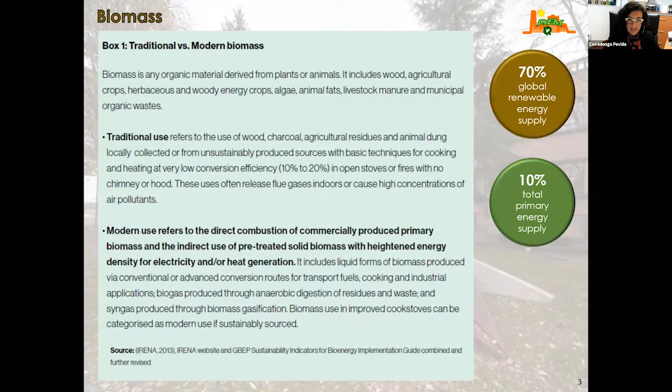We also have an increasing demand of biofuels, and of course we can produce biogas out of biomass. But what is clear today is that bioenergy accounts for about 70% of the global renewable energy supply, about 10% of the total primary energy supply. And regarding the end uses of bioenergy, the largest share corresponds to the building sector with 26%.

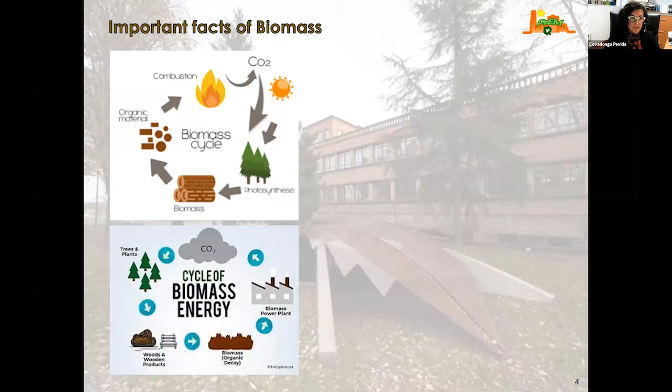So what is important about biomass, as Professor Rubiera has already highlighted, is that biomass takes part in the carbon cycle, which means that biomass is produced by photosynthesis and uses CO2. So it's a natural contributor to the carbon cycle. But what is more important in terms of the energy utilization of biomass is that the CO2 emissions coming from biomass are considered neutral. So that is very interesting from the renewable and sustainable point of view.

So we can end up with a summary of some energy pros and cons from biomass. If I need to highlight, I may say that biomass can be seen as a renewable, widely available, and diversified source of energy that can be cheap and that has a lot of potential in many applications. The main weaknesses could be that large-scale devices may be costly today, that they may not have high efficiencies, and there are still some associated issues with environmental and health concerns related to the use of biomass for energy production. But as I have already commented, there is a broad range of applications of biomass.

So let's analyze a little bit the different pathways for conversion, product, and end use for biomass. We know we have a lot of feedstock possibilities, as I commented previously, but focusing on the production processes, we have two main alternatives. One is the biological route, and the other is the thermochemical conversion route.

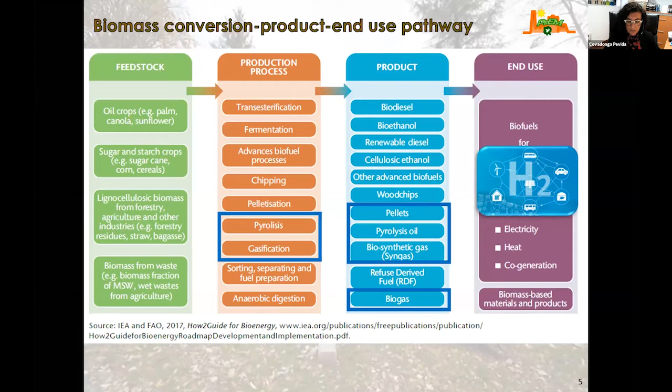To use biomass for energy purposes, it is important to pre-treat biomass because, as included in a previous slide, the density of biomass is low compared to fossil fuels. So there are two main ways to increase the density. One is pelletizing biomass, so you can pelletize biomass and see how you manage to increase not only the bulk density but also the energy density of raw biomass.

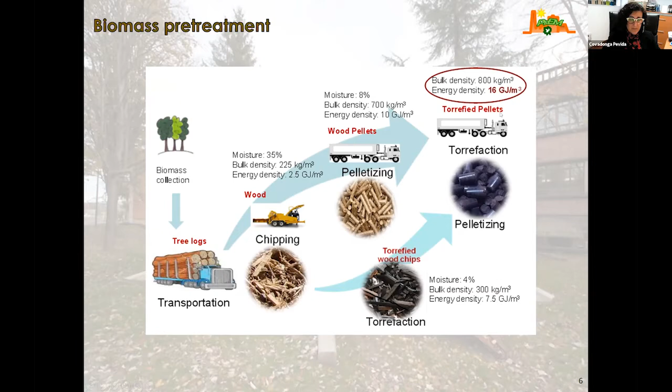But you can also thermally treat biomass in a process called torrefaction, a mild heat treatment, and you arrive at a significant increase in energy density. If you end up pelletizing this torrefied biomass, you will have a fuel with very appealing characteristics to be burned in boilers.

I'm not going into details, but just to mention there was a statistical report issued last year in 2020 that you can check. It was issued by Bioenergy Europe and devoted to the pellets market.

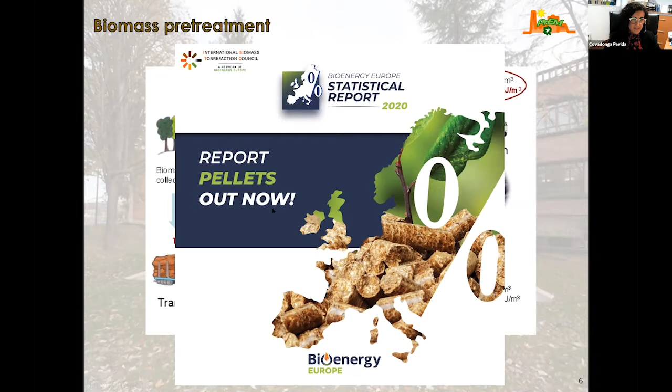Focusing on the thermochemical conversion of biomass, the topic of today's webinar, you can see in the slide the multiple pathways you can follow to convert raw biomass into different products that go from heat, electricity, and chemicals.

We have pyrolysis, liquefaction—today a hot topic, particularly hydrothermal liquefaction processes—gasification, and combustion. We can produce solids, liquids, and gases out of it, and also heat that we can then upgrade through different possibilities. We end up with chemicals, fuels, and of course electricity and heat, as I mentioned before.

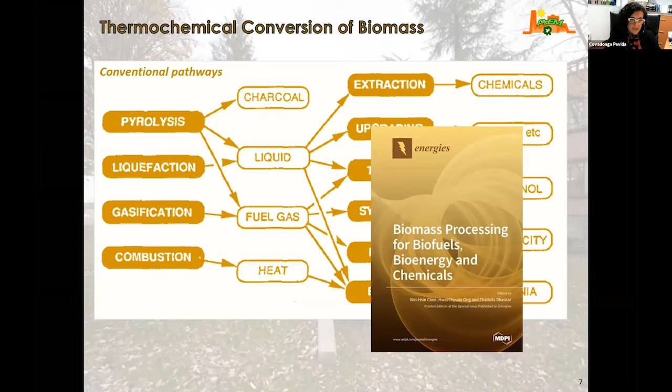I'm not going into the details of all these processes, but I suggest you check a recent book published by Energies last year on biomass processing for biofuels, bioenergy, and chemicals.

Before I move to the particularities of my talk today, I'd like to highlight that biomass conversion technologies are not at the same level of maturity. You can see that only the thermochemical conversion technologies associated with combustion to produce heat and electricity can be seen as commercial today.

We have pyrolysis of biomass at, let's say, ready-to-market level, and we have biomass gasification, which is considered a demonstration technology today, even though the number of facilities has increased a lot. One of the main drawbacks is related to the cost of implementation, but obviously this data is evolving, particularly in recent years, so I'm sure this curve is getting lower these days.

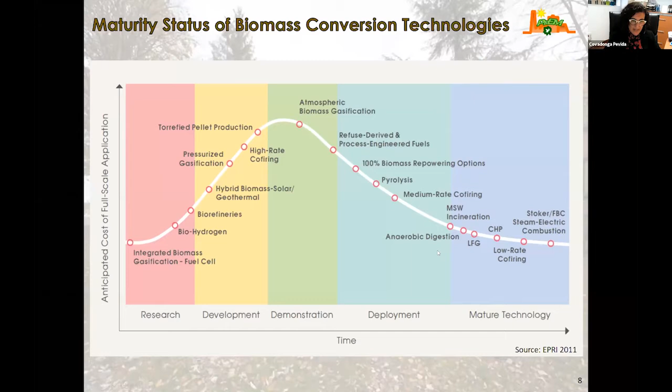So now I will focus on what I mentioned before: that through thermochemical conversion of biomass, you can produce hydrogen—renewable green hydrogen. So it is an alternative to what is commercial today for the production of renewable hydrogen, which is electrolysis.

So the key thing here, in order to implement the thermochemical conversion of biomass to hydrogen, will be the selection of the biomass feedstock that is more suitable to either the pyrolysis or the gasification route.

Obviously, the development of catalysts is pivotal in the development of the technology, because they are needed for the reforming and water gas shift reactions. And of course, in order to get high purity hydrogen, you may need to remove CO2. So the separation technology that you choose to remove CO2 will be also critical in the development.

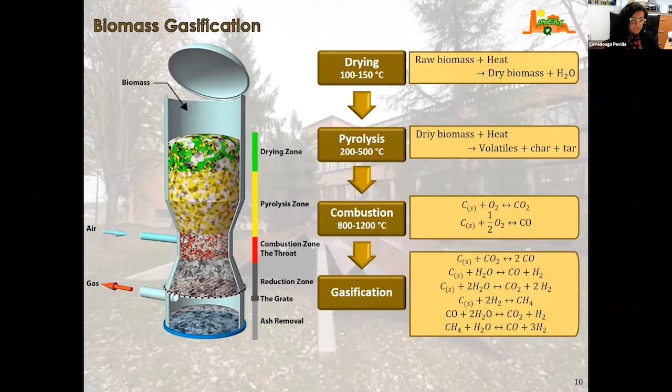There are multiple types of gasifiers, and depending on the gasifier, the range of temperatures that you may be able to use will be different. Also, the type of feedstock is critical to decide which type of gasifier, and also there are limitations in terms of scaling of the gasifiers.

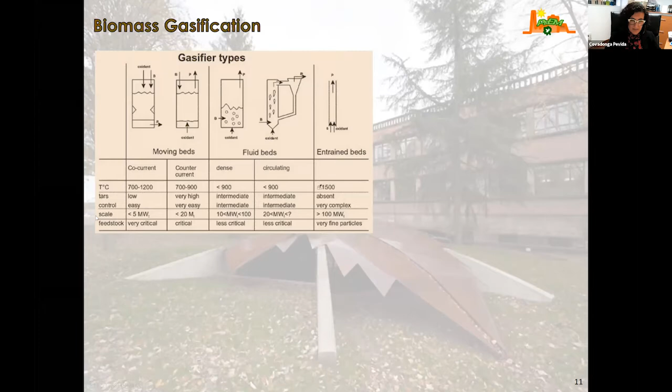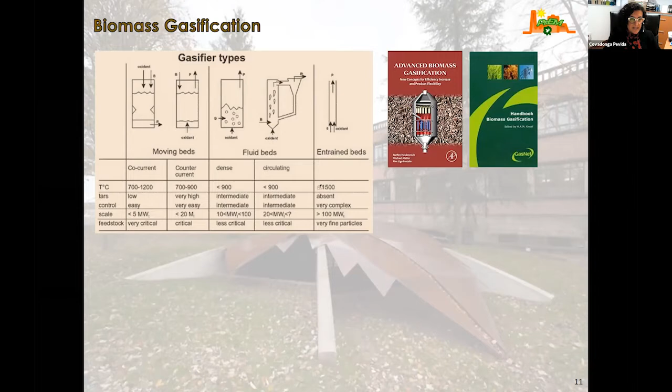I will not go into the details of the gasification technology because that is huge and there's been a lot of work on that. May I suggest two references for you in order to check more details? I would like to highlight here that depending on the gasifier, you will be limited in terms of the capacity of biomass that you can handle. So entrained flow gasifiers seem to be the ones with the higher capacity.

Obviously, what is key in the biomass gasification process is the oxidation agent that you use. You can either use air, oxygen, or steam. Steam will be your choice if you intend to produce hydrogen.

It is also important how the heat is provided to the process, if it is provided directly by the combustion of the biomass or indirectly. And also the pressure level, because gasification can proceed at atmospheric pressure, that is the most developed technology, or there is also the possibility to proceed at higher pressures.

There has been issued a recent report by the International Energy Agency Bioenergy section that has summarized the wide and broad number of gasification installations in Europe. It's very interesting to check that. And it has to say that this number is increasing these days because gasification seems to be a very promising technology to exploit biomass.

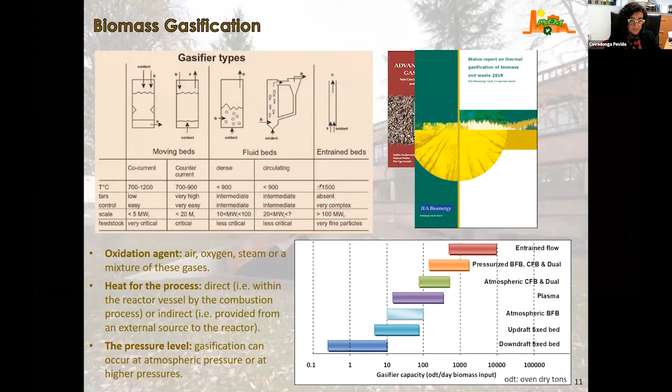Obviously, when talking about biomass gasification, we cannot forget to mention the IGCC technology, which is the integrated gasification combined cycle technology. So gasification has the ability of providing not only a gas that can be further processed to produce hydrogen or to produce biofuels and chemicals, but there is also the possibility of using this producer gas in a gas turbine and in a vapor turbine in order to produce electricity. So that is what the IGCC technology is about.

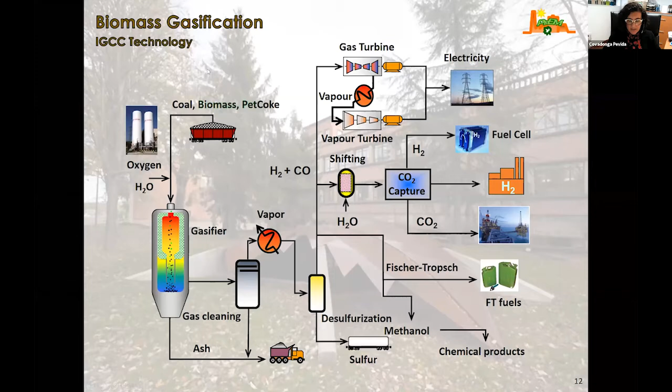Moving into the reforming, that is also part of my presentation today, here we need to change the topic because when during gasification we can process solid biomass, for reforming, we need to pretreat this biomass. So we can reform liquid forms of biomass.

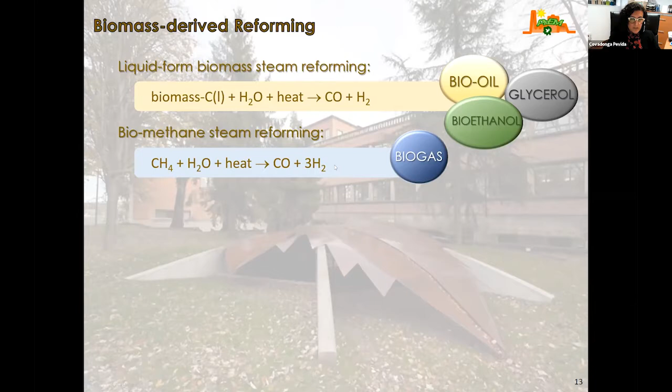When we aim at producing hydrogen, we will use water vapor as oxidizing agent. And there are multiple liquid derived biomass products that we can reform. That includes bio oil produced from pyrolysis of biomass, glycerol, bioethanol. And also there's the possibility of reforming biogas. This is an interesting approach that we are doing research on within my group, and I will show you later on. And that is because, since biogas includes methane, you can reform methane to produce syngas that then you can move forward with the water gas shift to produce hydrogen.

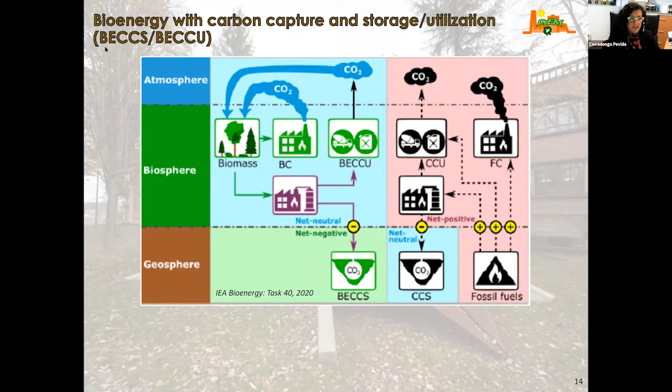Moving into my topic today, as I mentioned before, if we intend to produce hydrogen out of biomass, we need to remove the CO2 that comes out with it. That links to the concept of bioenergy with carbon capture and storage or utilization, known as BECCS or BECCU technologies. You can see in the slide the concept of these two technologies.

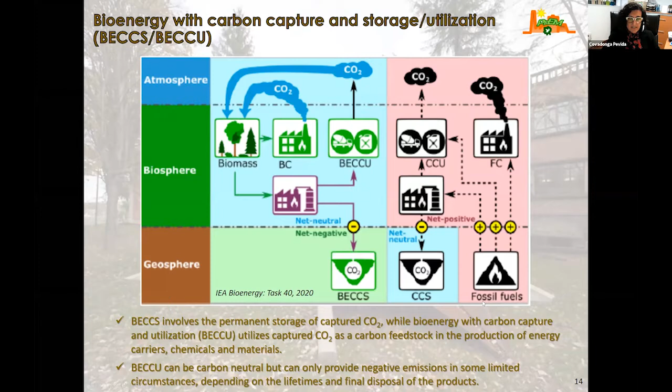It means you are using biomass to produce bioenergy or biofuels. In this process, you are producing CO2, and you can either capture this CO2 and further use it for the production of chemicals, for instance. In this case, your process can be seen as net neutral. But there's also the option of storing the CO2 that you have captured - that's the BECCS concept, and it's the only technology where you can really achieve negative carbon emissions. That's very interesting compared to the conventional CCS routes associated with fossil fuels.

The largest BECCS facility is this one in Illinois Industrial, run by Archer Daniels Midland. It processes up to 1 million tons of CO2 per year, and it is devoted to bioethanol production by the fermentation of corn. The CO2 that is captured is further stored in that case.

There is a facility in Japan that can be considered the world's first application of CCU - utilization of CO2 from waste to energy. It's been processing 3,000 tons of CO2 per year for crops and algae cultivation.

We also have BECCS in power generation. Another example in Japan is the Mikawa power plant by Toshiba, that was a retrofitted power plant. It also has a CO2 capture pilot unit, but it was converted from coal to palm kernel shell power, and it is producing and capturing up to 500 tons of CO2 per day.

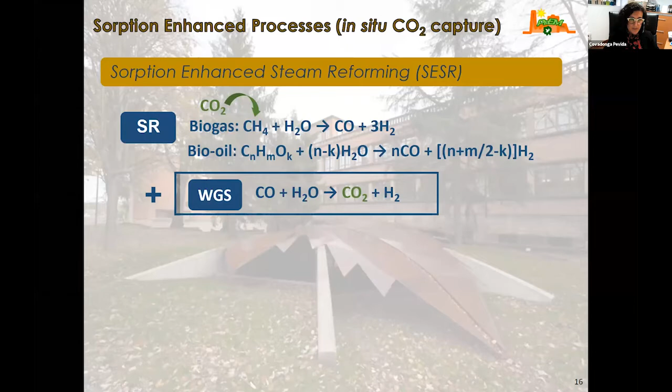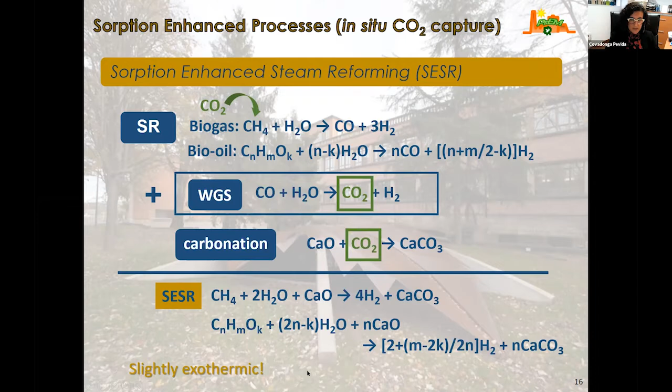For the sorption enhanced steam reforming, we've been using biogas, which has the particularity that we are not upgrading it, or bio-oil. If we combine the reforming reaction with the water gas shift and the use of a solid sorbent to capture CO2, we end up with high content of hydrogen in the gas stream as well as calcium carbonate. The advantage of this technology is that thermodynamically it is slightly exothermic, which is very good in terms of implementation.

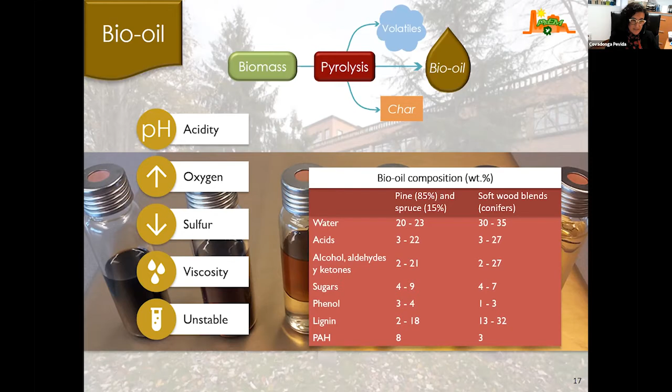Within our group, we've been doing work with bio-oil components. Bio-oil is quite tricky to work with because it is unstable, quite viscous, and has a quite high oxygen content. So we started our research working with bio-oil components.

Let me show you some of the outcomes of our research. On the left-hand side, you have the results of sorption-enhanced steam reforming applied to acetic acid, acetone, and blends of those. What we obtained after this research is very high purity hydrogen at moderate temperatures compared to other thermal processes. What was very positive is that we obtained similar hydrogen purities in the blends as in the individual components. Unfortunately, in terms of hydrogen yield, they were a bit lower when we blended the two components.

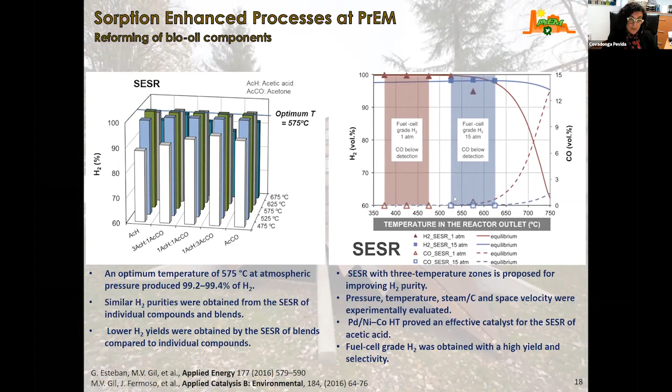Another work focused on running this sorption enhanced process not only at atmospheric pressure, but also at high pressures. We end up with the production of fuel cell grade hydrogen at both conditions. Obviously, depending on the conditions, the optimum range of temperatures for high purity hydrogen production is different.

Also, as I mentioned before, we are doing a lot of research into using biogas directly to produce hydrogen by sorption enhanced biogas reforming. Let me show you the recent outcomes of some of our projects.

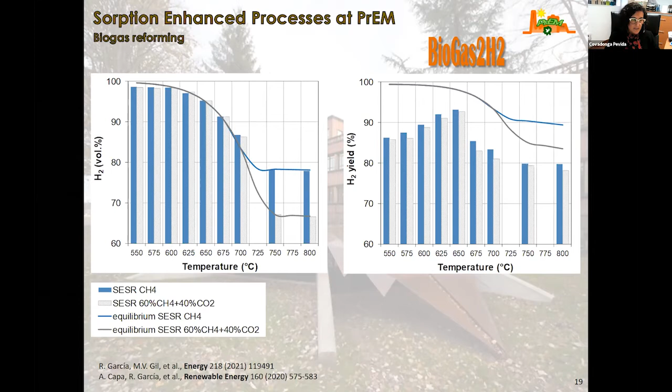You can see in the slide that by this sorption enhanced biogas reforming, we manage not only to produce very high purity hydrogen, but also at a high yield. We also found that the maximum hydrogen yield was at temperatures a little bit higher than in the case of the bio-oil components, but still at temperatures that can be considered moderate. What's important here is that the CO2 contained in the biogas we are feeding into the system does not affect the performance of the whole process.

We have also applied the sorption enhanced concept to steam gasification because we have a background on steam gasification of biomass. There's a lot going on in sorption enhanced steam gasification, but our approach is a bit different from what you see in the literature because we are also including a catalyst in the process, similarly to what we are doing for steam reforming.

So once again, combining the steam gasification of solid biomass with the water gas shift reaction and the carbonation reaction, we end up with a high purity hydrogen stream and also calcium carbonate. The process is also slightly exothermic, which is very positive from an implementation point of view.

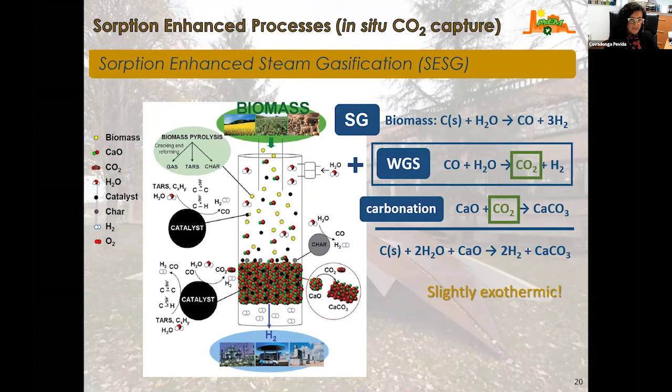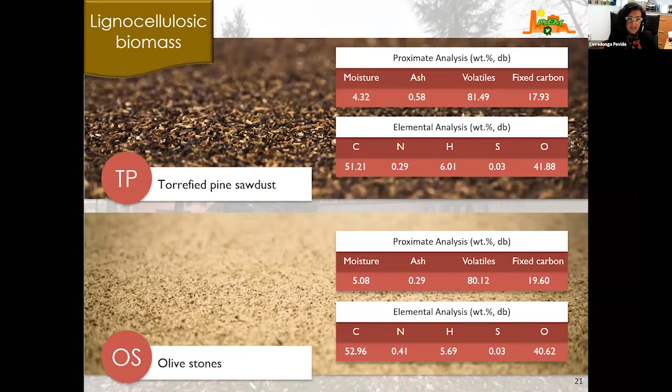Let me show you some of the results we obtained for two biomasses: torrefied pine sawdust and olive stone. You can see that in terms of proximate and elemental analysis, they do not differ much.

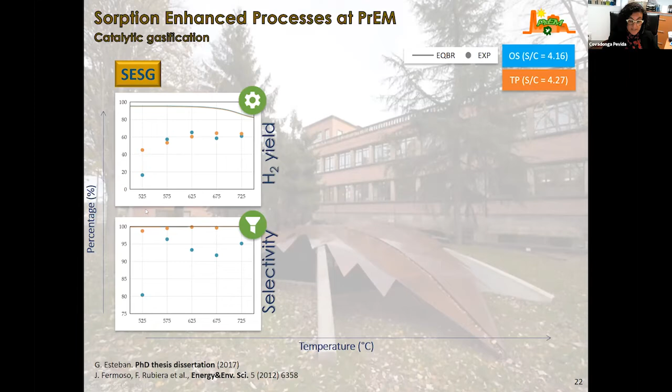However, when we test them for sorption enhanced steam gasification, we see differences, not only in the hydrogen yield but also in the selectivity. As you can check in the slide, the dot points are for olive stones and torrefied pine. You can see that the yields here are moderate compared to the reforming processes.

If we compare sorption-enhanced steam gasification with conventional steam gasification, we do not see such an improvement in hydrogen yield, maybe some improvement in terms of selectivity. But what is important and needs to be highlighted is that in terms of hydrogen purity concentration, with sorption-enhanced steam gasification we managed to obtain a high purity stream of hydrogen that we were unable to obtain with conventional steam gasification. So that was all from my side.

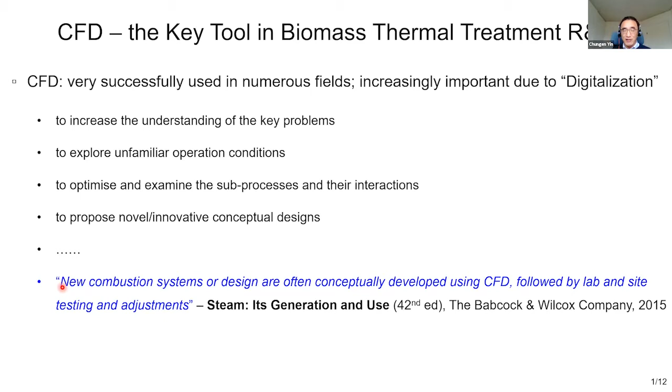For CFD, for modeling, it's so important in many areas in which fluid flow is involved, so for our area, for instance, biomass thermal treatment: biomass combustion, gasification or pyrolysis. I want to highlight its role as mentioned in the big handbook, Steam: Its Generation and Use. If you look at the last bullet point, I just copy and pasted from this huge handbook. It says, and it's actually repeated quite a few times throughout the book: new combustion systems or designs are often conceptually developed using CFD, followed by lab and site testing and adjustment or refinement.

For gasification and combustion, if they are used as independent technologies, their purposes are very different. For gasification, it's mainly to produce combustible gases, syngas. For combustion, the main purpose is to produce or maximize the production of heat by completely burning biomass into carbon dioxide and water vapor - heat is the main purpose. Gasification and combustion actually have a lot of similarities - not only that, in real life they are actually part of each other.

If you look at commercial technologies, they are from both gasification and combustion. There are three major technologies. For instance, we have moving bed gasifier, and moving bed, or grate boilers, for combustion. The second common technology is fluidized bed. We have fluidized bed gasifier, and fluidized bed combustor boilers. And also the majority is suspension flow, either gasifier or combustor boilers.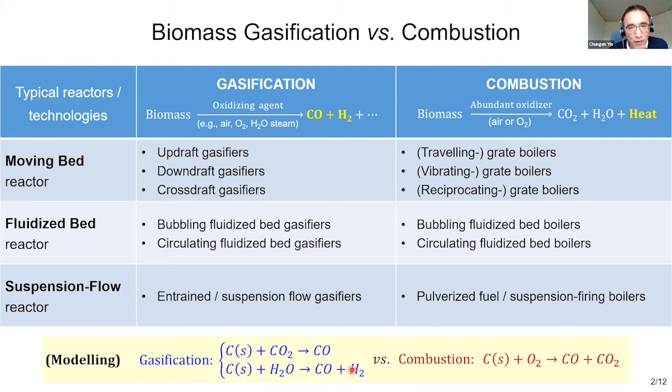If we are doing combustion simulation modeling, we can still include gasification, but the major reaction will be solid carbon into carbon dioxide and water vapor with oxidizer - or rather, into carbon monoxide and carbon dioxide, depending on the reaction temperature. So this is actually the major difference between gasification modeling and combustion modeling.

So we have three different technologies for both gasification and combustion. The first two include a kind of packed bed. For moving bed and fluidized bed reactors, we have a packed bed at the bottom of the reactor or gasifier or combustor. So if we do the modeling of this kind of reactor, there are two separate modeling tasks.

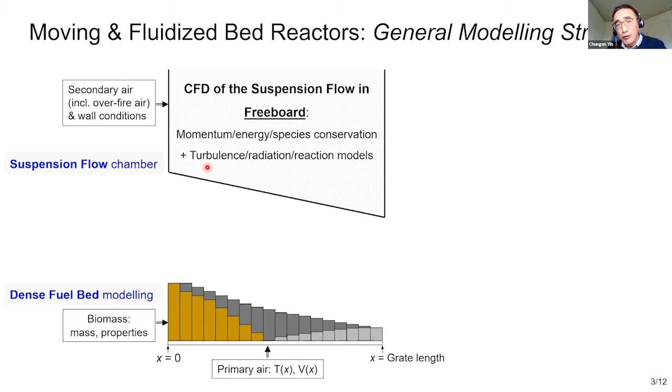One is modeling the dense fuel bed at the bottom. Another is the simulation or modeling of the suspension flow chamber in a moving bed or fluidized bed, which we call the freeboard. If we have a suspension firing boiler or gasifier, we don't have a fuel bed. So that top part, the suspension flow chamber, is actually in common for all the reactors.

That's why we start there. Of course, in real life, the two different modeling tasks will be highly coupled to each other, by the entrained combustible gases or combustion flow which is released from the top surface of the dense fuel bed into the freeboard, and at the same time by the radiation heat flux which is emitted from the flame or the hot wall in the freeboard onto the top surface of the fuel bed.

Since the suspension flow chamber is common in fluidized beds, grate boilers, and suspension flow gasifiers, that's why we first focus on the suspension flow chamber or furnace gasifier and how to do the CFD simulation. Here's a very brief flow chart of how to do CFD simulation of suspension flow reactors.

Basically, we have three major steps. The first step is to calculate the continuous phase flow field, which includes a lot of equations - we need to calculate velocity, pressure, temperature, species, and turbulence at the center point of each control volume in the whole reactor.

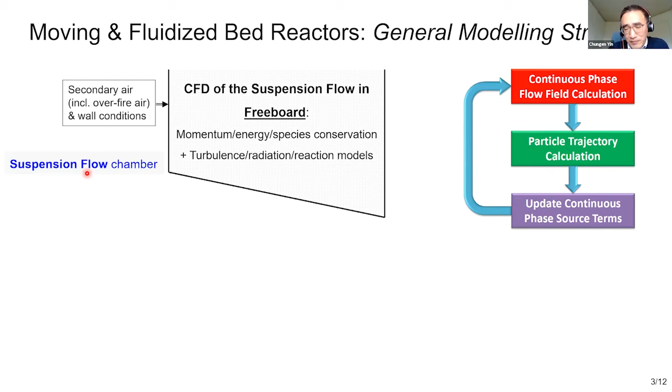So here I just give you an overview of different models when we do suspension flow CFD modeling. At the center, we numerically solve the conservation equations of the flow field. Basically, we solve the continuity equation, Navier-Stokes equation, energy conservation equation, species conservation equation, everything.

These kinds of equations are rigorous conservation equations. There are no errors or uncertainty within these conservation equations. And these conservation equations are supplemented or closed by a number of models.

As you can see here, we have models which belong to combustion physics. For example, we need particle motion models, different forces, turbulence dispersion. We have turbulence models. Turbulence is widely used in almost all the reactors because it can enhance mixing and enhance everything, of course.

And we have radiation heat transfer. In combustors, in gasifiers, we have high temperature environments. It's always radiation heat transfer that plays a dominating role in the heat transfer and mass transfer. So the three blue bubbles represent the combustion physics area.

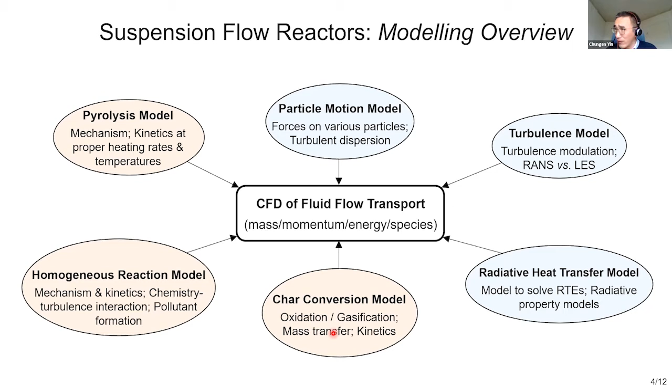We have traditional models for all of these, but I should say these kinds of models have limited applicability. For instance, they are used for traditional pulverized coal combustion. But now, if we have pulverized or milled biomass gasification or combustion, we have some special issues, which means we need to modify and extend some of the models to make the entire scenario applicable to biomass gasification or combustion.

We have a number of specific issues that need to be addressed in order to make the entire CFD framework applicable to biomass. The first specific issue is biomass motion.

If you look at particle motion, normally the traditional model only solves the translational motion of the particles. We have this equation of motion with forces here, acceleration, forces per unit volume, per unit mass on the right-hand side. In the traditional model, we mainly retain drag force and gravity.

This is applicable for a heavy, tiny, spherical particle, which is okay for the traditional pulverized coal particle, on the order of tens of micrometers, nearly spherical and heavy, meaning the particle-to-air density ratio is about 1,000.

But if you look at biomass particles, they are very different actually, depending on the milling process and the preparation process. In the older days, a lot of biomass particles were prepared by direct milling of the raw biomass, raw straw, raw wood chips, and these produced quite large biomass particles.

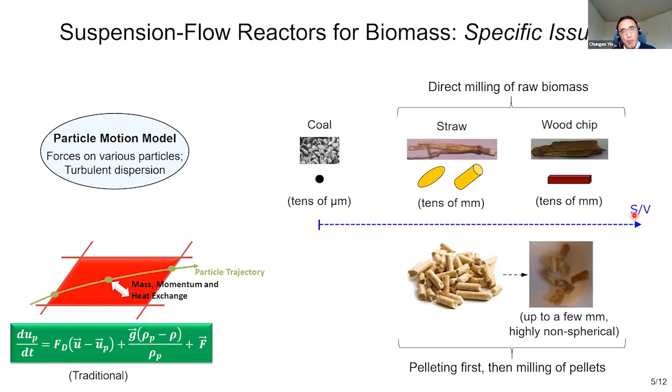If you look at their shape, they are still highly non-spherical. The biomass particle has very different specific surface area characteristics, and this kind of characteristic will largely affect both motion and the conversion of the particles.

That's why we look into the first specific area, the motion pattern of the large, highly non-spherical biomass particles. So that's a kind of test we have done in the lab by mimicking biomass particles. It keeps the size, keeps the aspect ratio. And you can see nowadays, both translation motion and rotation motion is very important for this kind of large non-spherical particles.

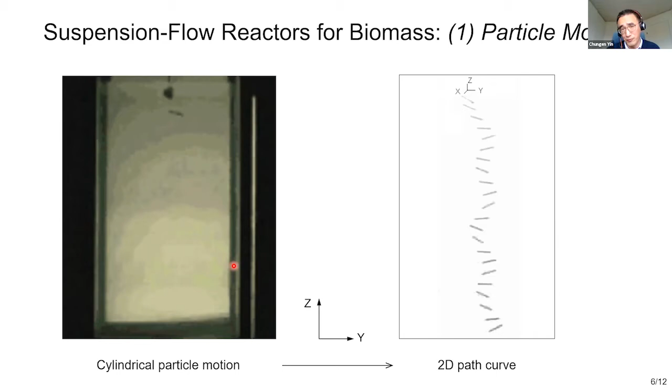Then we try to develop a model to reproduce our experimental study, and we largely extend the traditional model, which is nowadays used in the combustion or gasification modeling community. Nowadays, as I mentioned, the traditional model only solves the first equation, with two forces in the equation of motion: drag force and gravity.

Then we extend the modeling framework into translation motion and rotational motion. For the translational motion, we include a few more important forces: pressure gradient, virtual mass, and especially lift force.

In the equation of motion, we have drag force and lift force. Both of these forces are dependent on the shape effect of the particle and also particle orientation. That's why we also need to solve the particle rotational motion.

We have explained, and nowadays we have the torques, Tx prime, Ty prime, Tz prime. They are very complicated. We need to take into account all the important torques acting on the biomass particles.

Another thing I need to highlight is the equation of the translational motion is described in the inertial coordinate system, and the particle rotational motion is described in the particle coordinate system. So that's why we need a kind of transformation matrix to bridge this equation and this equation. It's very complicated, that's for the particle trajectory and particle motion.

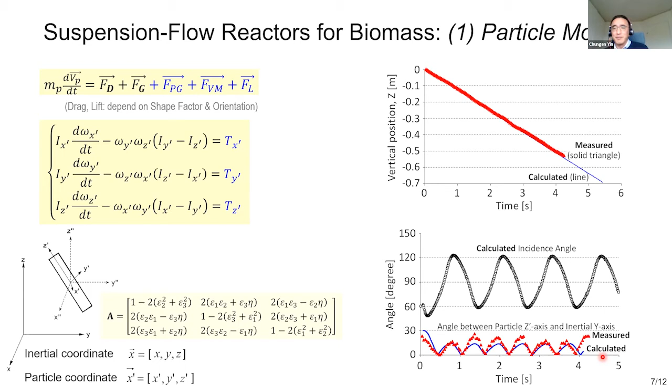The second issue, as I mentioned, is particle conversion. For suspension firing, one of the very important issues is we need to decide the maximum particle size that is acceptable for a certain pulverized fuel, either in a gasifier or combustion boiler, to make sure we have a kind of complete conversion or complete burnout within the short residence time.

Because we know for a suspension reactor, the residence time of the particle in the reactive zone is very short, on the order of a few seconds. So that's why we did a lot of tests.

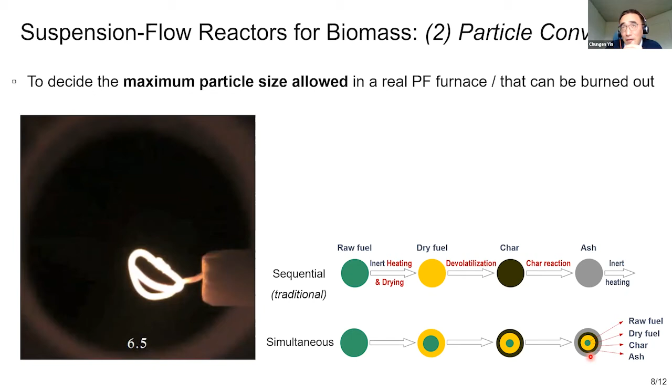Which means we need to refine the model. We need to develop a new model to replace the traditional model to make sure we capture this kind of simultaneous conversion pattern. So this model, of course, is quite complicated.

If we look at the flow chart of this kind of model, it includes a lot of blocks. Here I need to highlight only 3 blocks or subroutine blocks. The first one is the particle interaction with the ambient flow—mainly to calculate the particle surface and ambient flow heat and mass transfer. And the most important, or most difficult thing, is we need to solve the intra-particle conversion processes.

We need to solve all the transport equations within the particles numerically—mass, momentum, energy, reactions, everything within the particles. And the last key block is we need to update the particle overall parameters, for example particle size, particle structure, the particle as a whole. For example, we have swelling, we have shrinking. We need to take this into account.

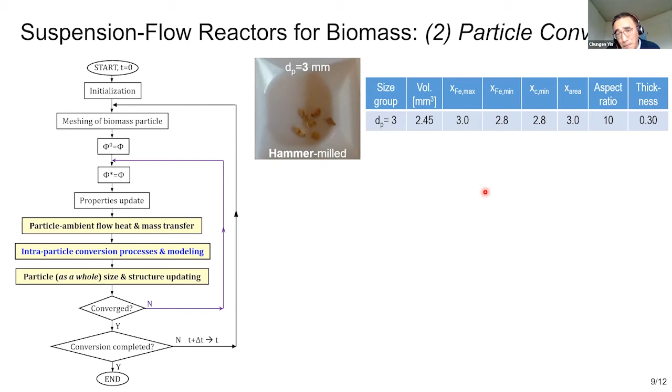And then we developed a model, and we did a lot of testing for validation. For example, here we have this kind of particle, which is a real life particle we collected from the feeding line in the power station. It's hammer milled wood chips. The nominal size is 3 millimeters in diameter, but it's not spherical, so we use camera sizing to produce comprehensive information about the particle size and other properties.

And then for this kind of particle collected from the feeding line, we did a lot of testing in the lab. For example, we performed a combustion test under 3 times 4 different conditions—12 different conditions—4 different oxygen concentrations: 5%, 10%, 15%, 20%, under 3 different temperature levels: 1200, 1400, and 1600 degrees Celsius. And the major issue for the combustion test is to get the burnout time.

We also try to reproduce this kind of combustion test with this model, and with this model we can predict everything—we can get drying time, devolatilization time, and of course burnout time also. We compare with experimental study as a kind of cross validation of both our testing and the model.

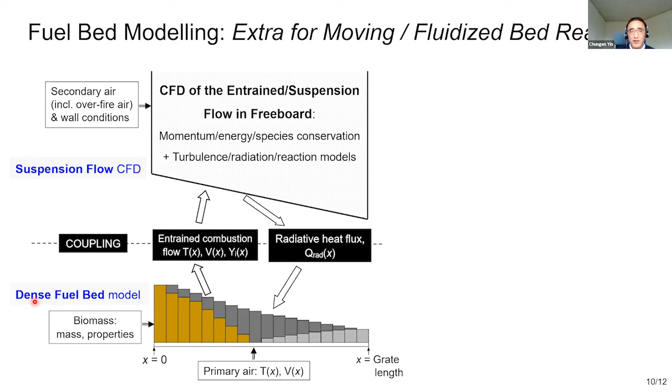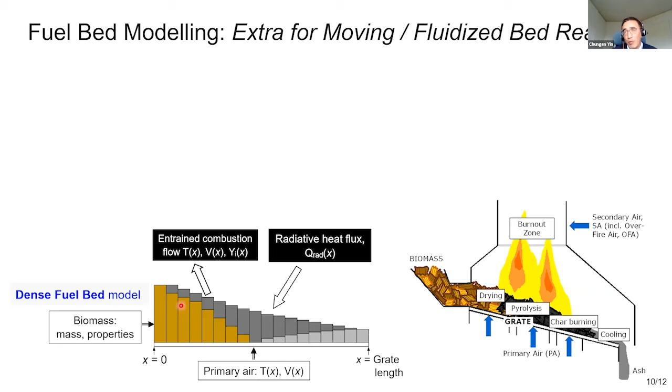And if we have a moving bed or fluidized bed, besides the freeboard and suspension flow, we still have additional efforts, an additional model for the dense fuel bed at the bottom of the reactor, to reproduce everything within it. Just to give you an example, we also developed this kind of model for dense fuel bed conversion, mainly for combustion application, but it can also be easily reformulated for gasification or pyrolysis.

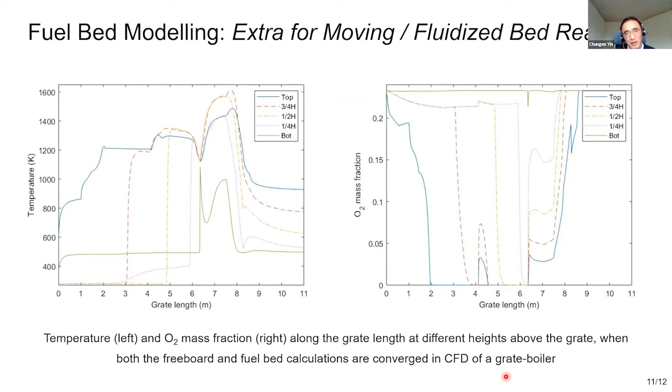So here, just to give you an example, I show you the temperature profile on the left-hand side and the oxygen mass fraction on the right-hand side along that grate, from the biomass inlet to the ash pit outlet, at different heights above the grate—just above the grate, one quarter of the bed height, and up to the top. So when both the freeboard and fuel bed calculations are converged in a steady simulation of a real grate boiler, this gives you an impression of the outcome of these models.

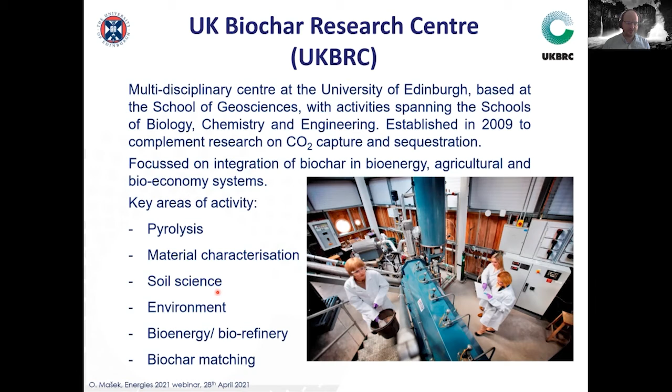So we cover quite a wide range of areas there. We have a range of experimental facilities from small-scale laboratory instruments where we can work with milligram or gram scales of samples, all the way to pilot-scale facilities where we can test or scale up the production of biochar from laboratory all the way to pre-commercial scale, at around 50 kilograms per hour of biomass throughput for our pilot-scale facility. So we can really do field testing of the materials and larger scale tests with tens or hundreds or even tons of biochar.

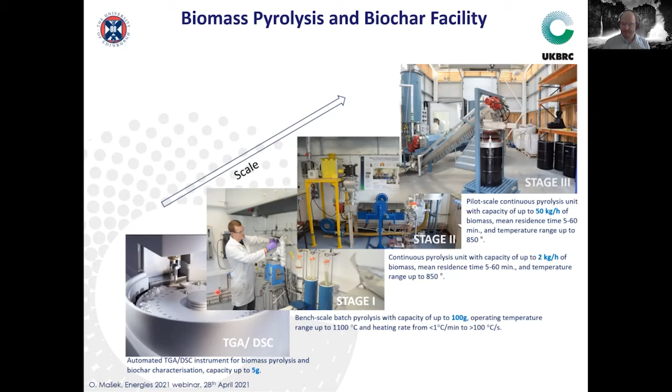Moving on to the topic that I want to cover today, that's pyrolysis and how we can use it to produce or to valorize biomass. First, maybe useful, although we've heard a bit about it already, is to define what pyrolysis is, and to show you that all of you, no matter what your area of expertise is, you are actually already familiar with pyrolysis.

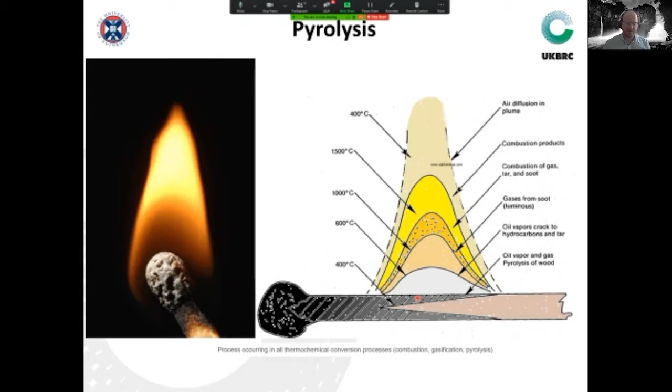You can see here a schematic of a burning matchstick, as well as an animation of the process. We are all familiar with the flame that we use for lighting candles and gas burners and so on. But pyrolysis is actually the process that's happening here where we don't see any flame, on the boundary between the visible flame and the matchstick. It's in this zone where the charring happens. The heat coming from the radiation of the flame is heating up the biomass, releasing volatile compounds, which move into the air and then react with oxygen, and that's where combustion happens. But this area here where there is no oxygen present, that's where the pyrolysis occurs.

So all of you have experienced pyrolysis many times in different ways. Pyrolysis is the process of thermal decomposition of biomass. It can be also coal, it doesn't have to be only biomass, when we heat it to temperatures of around 350 degrees and above. Before that we have drying, so release of moisture from biomass at temperatures below 200 degrees. And in the zone between pyrolysis and drying, we have torrefaction, which was already mentioned in the first presentation today as a method for pretreating biomass to make it more suitable for thermochemical conversion processes.

Again, pyrolysis is something we have all experienced, burning our toasts or chicken in the oven and so on, so that's sort of on the domestic front. It's also used quite extensively as an industrial process for management of waste, but also for conversion of biomass into various products. We've heard about bio-oil, so that's one type of pyrolysis.

Now, the pyrolysis process, although it's a very old process that's been around for a very long time, there is evidence of pyrolysis being used for production of liquids and tars for various uses already hundreds and thousands of years ago, with industrial processes around already 100 years or more ago for production of liquids and chemicals that were used before crude oil was discovered as a good source of hydrocarbons.

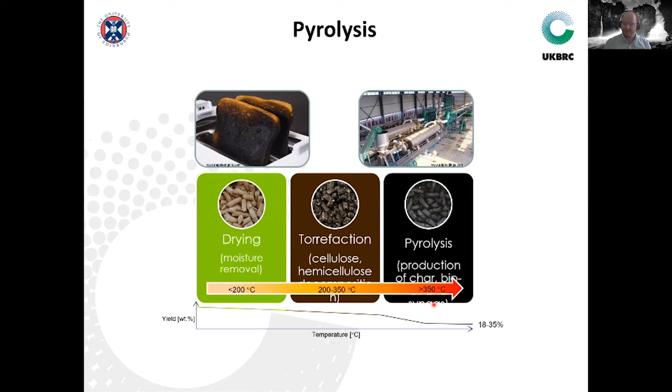The process affects all the different levels or scales in the biomass. Starting from the microstructure, the molecular structure, where the resulting products and the conversion process itself will depend on the composition of the material we're working with. As most of you will know, biomass consists mainly of cellulose, hemicellulose, and lignin, as well as extractives, ash, and other components. These are the major building blocks of any biomass, in different compositions and structures—different types of plants will have different lignin and so on. This very much affects the yields and composition of the products of pyrolysis. So understanding the structure on the molecular scale is very important.

Moving further up in the microstructure, that's how the solid biomass is built in terms of cell walls, and how they are structured and formed with capillaries and other parts of the structure. Again, this affects the process, both in terms of decomposition and also the release of the decomposition products—how easily or how difficult it is for them to escape the particles.

Then moving to the macrostructure—and we heard it in the previous presentation—depending on the size of the particle, we can have fine, small particles, or we can have large chips of very different shapes. The macrostructure affects the heat transfer, the mass transfer, and the flow of material in different types of reactors, whether it's a moving bed or rotary kiln, and so on. All these scales play an important role in understanding and predicting the composition of the final product and the yields of the products.

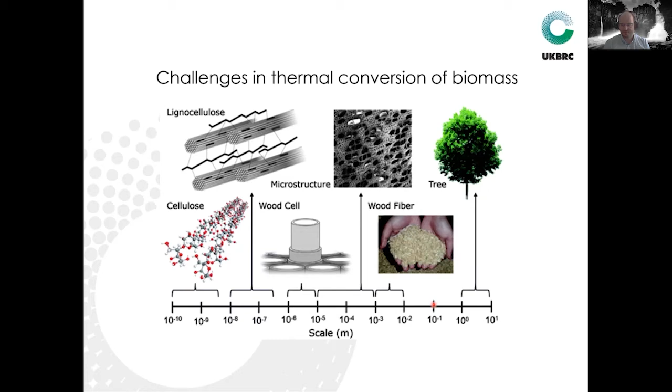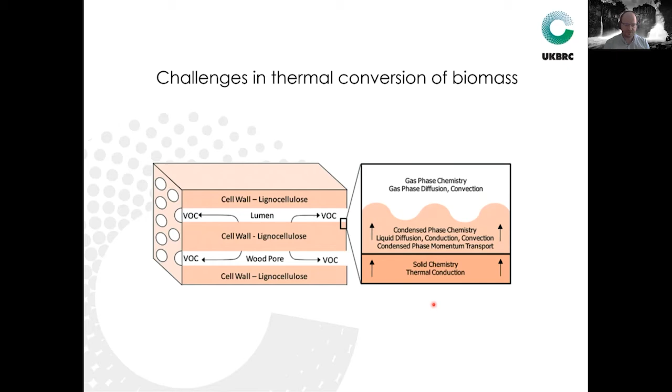Here is a schematic showing that we have reactions going on in the solid phase, the condensed phase, as well as the gas phase, and all of these are happening at the same time—making modeling of such a process very challenging if we want to go into all the details.

So pyrolysis gives us three main co-products: the solids, that's the biochar, gases, and liquids. All of them have their different uses, and I'll go through those in the next few slides.

There are different forms of pyrolysis, or pyrolysis put into different technological solutions. Here we have a diagram showing some of the key thermochemical conversion processes, with a few types of pyrolysis: slow pyrolysis, fast pyrolysis, gasification, microwave pyrolysis, as well as flash carbonization and hydrothermal carbonization. All of these processes yield all three co-products—solids, liquid, and gases—in different ratios.

Slow pyrolysis, which is the process we are most interested in at the UK Biochar Research Center, yields among the highest yields of biochar, and that's why it's our preferred choice of technology. It yields more or less equal amounts of liquids, solids, and gases—roughly a third each, depending on the feedstock and processing conditions. Here I'm mainly referring to temperature, but as a rule of thumb, you can assume it yields more or less equal amounts of those three.

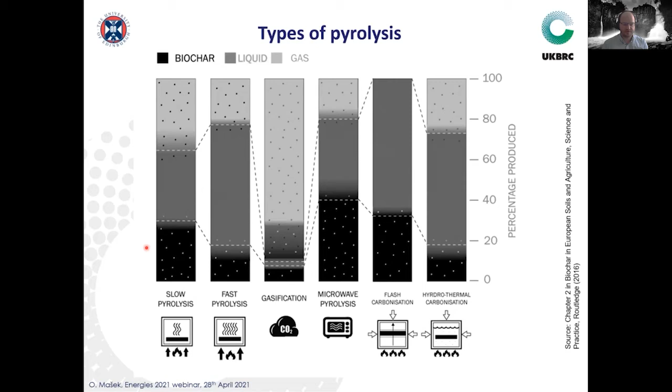So that's the different types of thermochemical conversion, all of which involve pyrolysis. Even the gasification process has a pyrolysis zone involved; it's just that after the pyrolysis zone, there is a gasification zone that decomposes the solids. So rather than leaving them behind as the pyrolysis process would, they are gasified to produce more hydrogen and carbon monoxide.

Pyrolysis technologies can be deployed on different scales and different levels of complexity. As I mentioned earlier, pyrolysis has been around for a very long time. It's been used for charcoal production since antiquity and perhaps even before. So it's a relatively well understood process on the surface, but when it comes to the detail of the process, that's a different picture. Charcoal production is a very old technology. Now there are newer approaches to charcoal production that are a bit more efficient, both in terms of labor and the yield of the product.

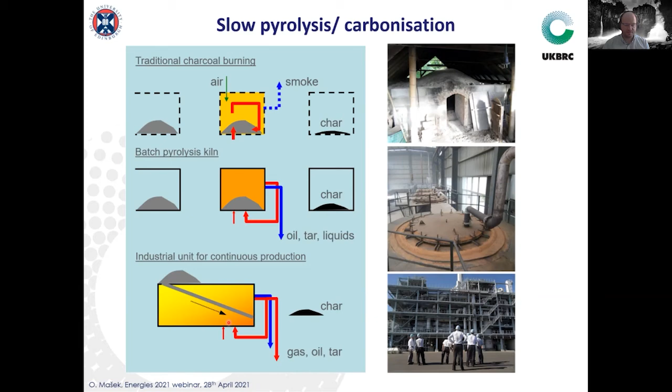Finally, we can have it also in the form of a large-scale industrial process. This is an example from Japan, from Tokyo. Here they produce biochar in this particular plant, from sewage sludge, from wastewater treatment, in a continuous process using a rotary kiln reactor, where the biomass comes in at the front end and the biochar comes out at the back, and the product gases are used for heating the process itself, so it can be self-sustained. In case of sewage sludge, there is a need for additional heat input because of the high moisture content of the material. But for certain materials, the pyrolysis process can be self-sustained, and other than for the startup, it does not require further energy input.

Looking at the uses of the different co-products, gases can be used either directly to be combusted at the production plant and used for heating the pyrolysis unit itself, with any additional excess heat used for pre-drying of the biomass itself or for other uses. We can also clean the gas and use it in a combustion engine to generate electricity. That's also a possibility, especially for larger plants where the gas cleaning equipment cost can be justified.

Another option, similar to the gases from gasification, is to upgrade the gas and use it for production of chemicals. That can be done either thermochemically in a Fischer-Tropsch process, where we can produce liquid biofuels such as jet fuels and diesel, or it can be done biologically in a gas fermentation process that produces ethanol, which can then be further used for production of chemicals, or used as a fuel directly as it is.

So there are different options depending on the scale and complexity of the process, because any of these further upgradings means a more complex process. The simplest option is to burn it on site and use the heat for running the process itself, which can be done on a small unit on a farm scale or so. For large industrial applications, it will be one of the other options here that will be more suitable.

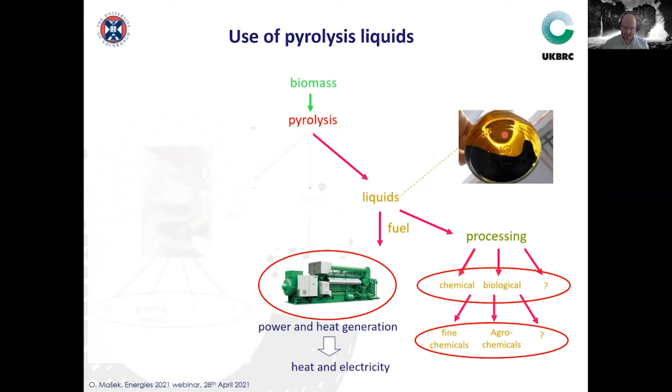Just a few examples here. The composition of the liquids very much depends on the composition of the biomass we started with, but also on the processing conditions, whether that's the temperature, the heating rate, or also the reaction atmosphere.

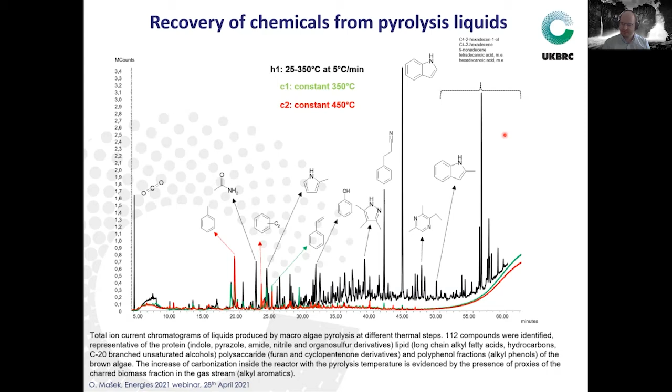We can do pyrolysis under inert atmosphere, such as nitrogen or argon. We can do it under CO2. We can do pyrolysis under various different atmospheres, and that will all affect the resulting composition of the products.

We can then try to find ways how to extract these, perhaps how to use some of these as precursors for other chemicals. So there is, again, a lot of research potential there, a lot of application potential as well.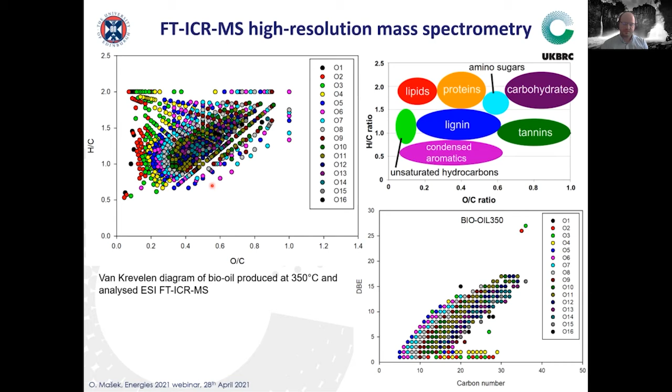Moving to the solid co-products, so the biochar, that has a number of uses as well. I'll show you a few examples of what biochar looks like, depending on what we start with.

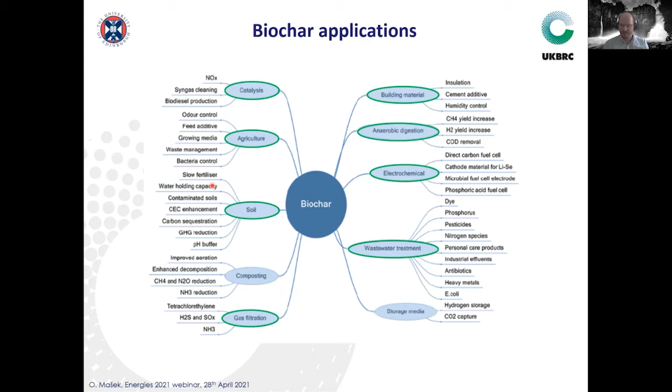One of the key reasons why biochar research has been initiated is the storage of carbon, or finding ways how we can store carbon that has been emitted to the atmosphere, how we can remove it and store it so that we can go back in time in terms of atmospheric greenhouse gas concentrations, or specifically CO2.

Earlier we heard about bioenergy with CCS as a potential way to effectively remove carbon dioxide from the atmosphere. Biochar is a similar approach in that sense, together with a small number of other technologies. There really aren't that many technologies that can do that.

In case of biochar, the way it works is that the carbon removed by plants from the atmosphere during photosynthesis, stored within the biomass, rather than allowing it to go back into the atmosphere as part of the natural carbon cycle, is diverted out of that cycle into long-term storage.

That storage can be in soil, and that is a good destination for the carbon, because not only does it store it for a very long time, it also has additional benefits for the soil in terms of quality. So rather than just focusing on climate change mitigation, this can actually help with climate change adaptation too.

We improve the soils in terms of water retention and nutrient handling. So under changing climatic conditions, the soils can still maintain their performance at the same level, or perhaps even better, when we use the right type of biochar. So really it's helping to solve two issues related to climate change, both adaptation and mitigation.

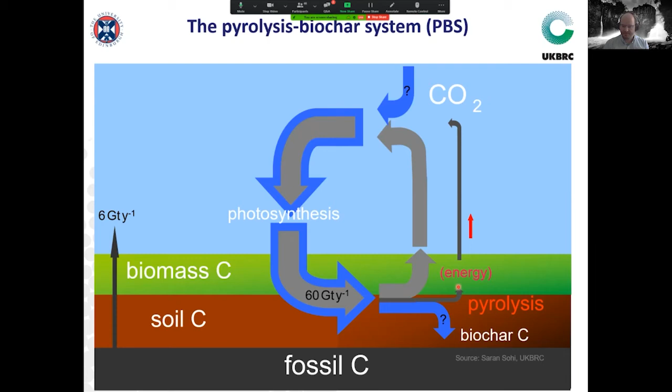Besides the direct impact on greenhouse gases, it also impacts other environmental factors, such as emissions of SO2, NOx, particulate matter, and black carbon. You can read the potential impact in much more detail in the paper. So there is a lot of potential there for biochar, specifically for China, but you could extend that to a global impact.

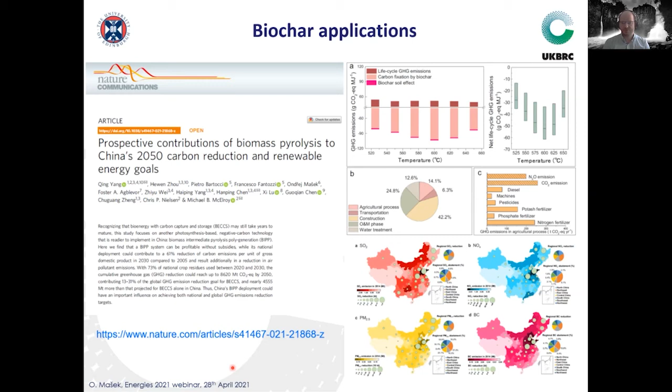Now, in terms of the resources we can use for biochar production, it can utilize most types of biomass, whether virgin or non-virgin biomass. Virgin biomass has the benefit of known composition, with small amounts of or no contaminants. However, it has a higher cost and high competition with other uses, such as competition with food, or with timber for construction, or production of chemicals.

Then there is non-virgin biomass that has a lower cost, but there could be challenges associated with the presence of contaminants. That needs to be carefully considered and addressed in the process so it does not negatively impact the resulting products from pyrolysis.

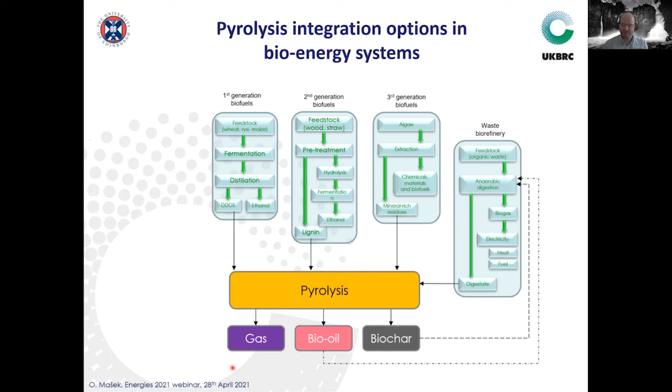In the next few slides, I will briefly present the potential integration of pyrolysis with other bioenergy technologies. I'll give four examples here: first-generation biofuels, second-generation biofuels, third-generation biofuels, and waste biorefineries.

Starting with first-generation biofuels, these rely on crops, mainly food crops such as sugarcane and maize, to produce ethanol. The ethanol can be used for consumption by cars or people, and it leaves behind a large amount of residues, depending on what biomass we start with: corn ethanol, dry distillers grains, whiskey draff if producing whiskey in Scotland, or sugarcane bagasse in Brazil and elsewhere.

These residues at the moment are often just combusted on site to produce steam or heat for the operating plants, or perhaps to produce some electricity in the boilers. This can, of course, be used for other processes as well.

It can be used for gasification to produce other second-generation biofuels from thermochemical conversion. It can also be used for pyrolysis, generating liquids and gases that can be further utilized, as well as carbon or biochar that can then be used back in the fields from which the biomass was harvested, helping to close the nutrient cycle and store carbon, affecting the carbon footprint of those biofuels.

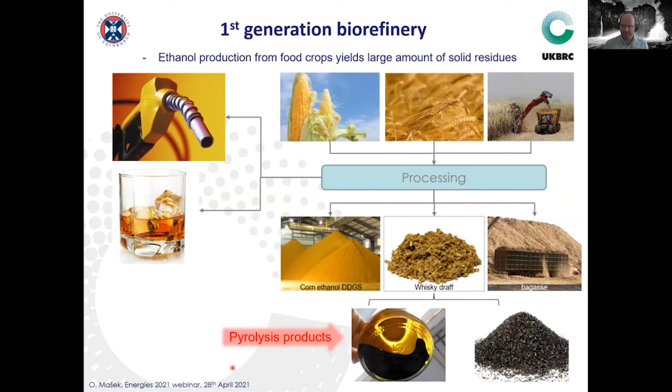Then we can move to second-generation biofuels. That's a technology that relies on non-food biomass, such as lignocellulosic biomass, like trees or wood or straw and so on.

Now, there is a lot of research going on into the utilization of lignin in various different ways, but different types of lignin have different potential for further uses. This could be a potential source of carbon for stabilization that could then impact and improve the carbon footprint of such a biorefinery and its resulting products.

So these are referring to lignins obtained even from the same biomass, but using different extraction processes. These can then be all used as a source for pyrolysis and for production of different added value products. Here I would like to mention a new Horizon 2020 project that we are participating in called Biomac.

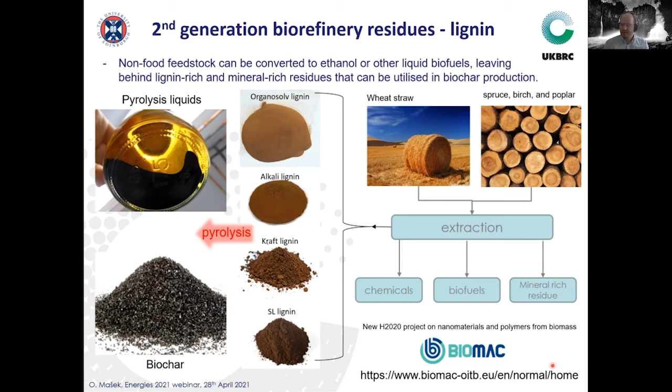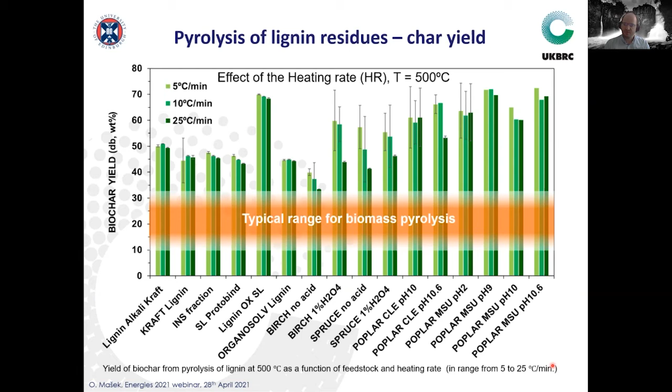Just as an example of results for different types of lignin, you can see here that the yield of the solid carbon, the biochar, is relatively high - typically just under or above 50%, which when compared to typical biomass pyrolysis is considerably higher, sometimes double the yield. So lignin is a very good source of biochar or solid carbon, and it also has very different properties than biochar obtained from raw biomass directly.

Moving on to third generation biofuels - here what I'm referring to is biofuels produced from algae. Because it's an aquatic plant, it does not require land for its production, so there isn't a competition not only for food, but also not for land, which can sometimes be an issue even for second generation biofuels, where they may be taking over land that otherwise would be used for food production. That is not an issue with algae.

In this particular case, I'll be talking about macroalgae, so seaweed, that's available in different forms all around the world. This has recognized potential to be a source of all sorts of products, including very high value products such as food additives, but also pharmaceuticals and so on.

However, the extraction process for these high value products still leaves behind a large proportion of the starting material - easily 40 to 50% is left as a solid residue. And this has a very low value; there isn't a lot of good use for that material.

However, what makes it interesting for biochar production is the relatively high concentration of nutrients in form of minerals - that can be potassium, calcium, other minerals present there, also phosphorus, depending on where the biomass is coming from. So we can produce mineral-rich and nutrient-rich biochar from such products. There are some potential issues as well, such as presence of sodium, so there is a lot of development needed to overcome some of those issues, but it's a very promising material and potentially very sustainable one.

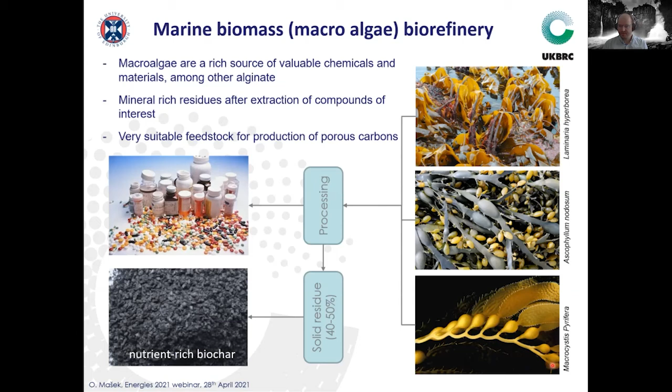The incoming organic material is microbially decomposed, producing methane, or it can be operated in a way that produces chemicals such as volatile fatty acids, leaving behind the undigested residue that could not be decomposed by microbes. That can be used directly on farms, but it faces a number of different challenges, most recently also related to presence of microplastics that come with the biomass source. So other solutions are being sought for this.

One of those is the potential of integrating with pyrolysis, where the solid residue is carbonized, turned into biochar, again with relatively high nutrient content because of the nature of the feedstock coming in. This then has subsequent uses. There are a few different ways to integrate this - there are two-way synergies, actually probably more than two-way synergies here.

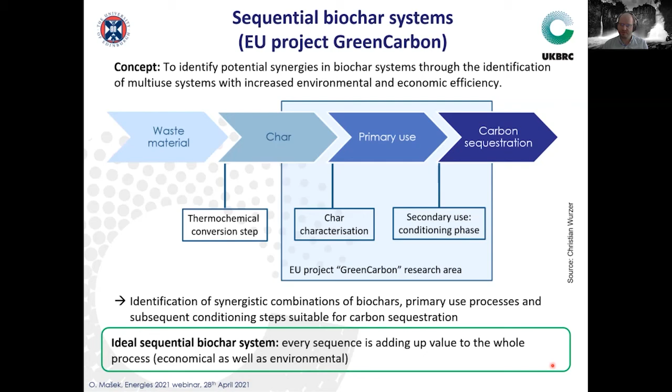Rather than producing biochar for one target application, which can be costly depending on the biomass and conversion process used, we can find ways to produce biochar for gas adsorption. After it's used for that and no longer performs well enough, we can use it for another application, such as anaerobic digestion, composting, or water treatment. And after that, for another application, or directly to soil. So we can have 2, 3, perhaps even 4 steps in the sequence, and each step shares part of the cost of production, so overall we can have very economically attractive solutions.

So just a few points for conclusions. The pyrolysis process can be used to process a very wide range of biomass. Especially slow pyrolysis is very flexible in that regard, and it can be configured in many different ways. We heard about gasification, moving beds, fluidized beds, and so on - the same applies to pyrolysis. It can be operated in many different ways to suit the type of biomass needed and the focus of the products we expect to have.

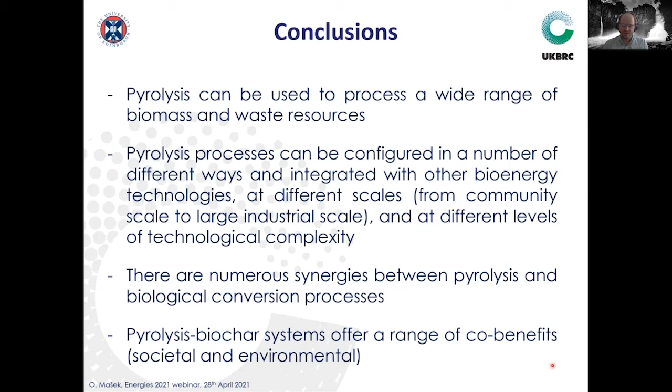There are various synergies between pyrolysis, a thermochemical process, and biological conversion processes such as anaerobic digestion, but also gas fermentation. And there are various other benefits of pyrolysis biochar systems, as shown in a recently published paper - environmental benefits, but also different societal benefits.